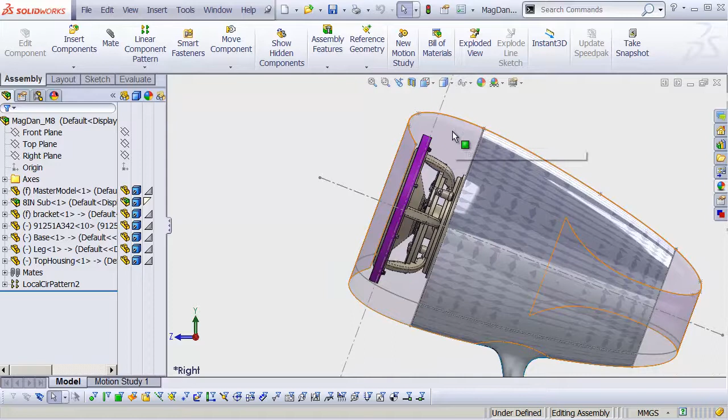Now this thing is finally actually really starting to take shape, and I next want to do the front piece of this, which I think we can do in a slightly different way. Because this one doesn't have to be in clamshell draft, it's actually in side draft, we can do this in a slightly different way. Let's go ahead and go to Insert Components, New Part, same as always. Front plane, same as always.

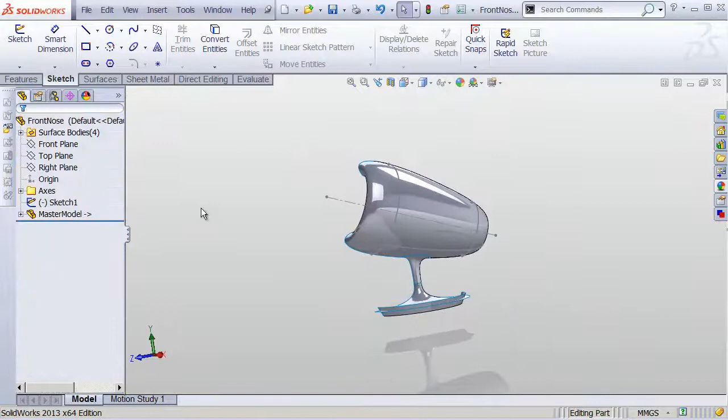We'll rename this Front Nose. I don't know, I'm making up these names. I'm going to right-click that and Save Part in External File and hit OK. Same as always, we'll open that up, insert our master model, and hit OK. We just need the surface bodies and unabsorbed sketches. And we actually only need that big fuselage piece. We don't need any of these other pieces. So we'll just delete those out right off the bat, just to clear this all the way out.

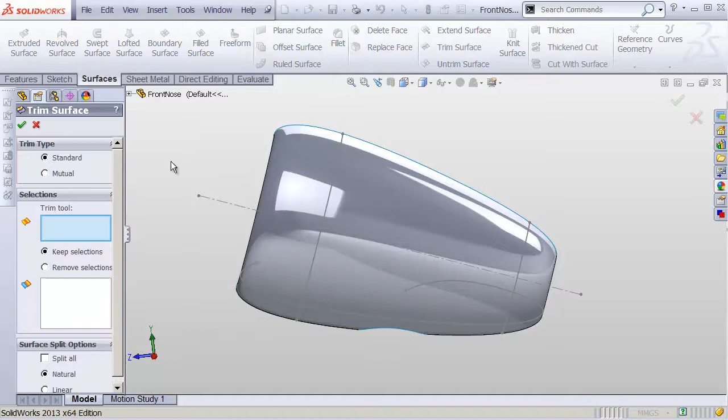Now, the next thing is actually to trim back this surface a little bit. So let's go to our surfaces. We'll do a trim surface. We'll do standard mode. We'll use this front guy. And this time we're going to keep the front nose cone of this. Hit OK. We're left with just that surface. And from here, I don't even need any of these sketches. So I'm going to hide the sketches as well, just to get those off my screen. And let's call this a nice, I don't know, purple color.

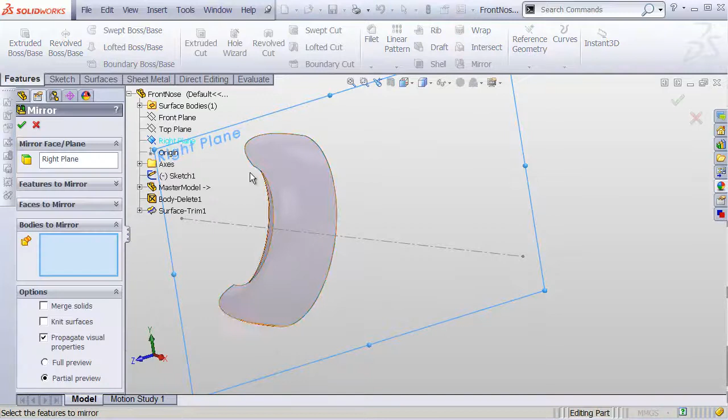And I'll grab the right plane, Features tab, Mirror, and under Bodies to Mirror, let's choose that surface body. And make sure to check the box for Knit Surfaces. Hit OK. That's going to merge that all together into one big round thing. Now, this one we're going to use a different method for making it solid because it does have an undercut, and it's actually going to be pretty straightforward to do.

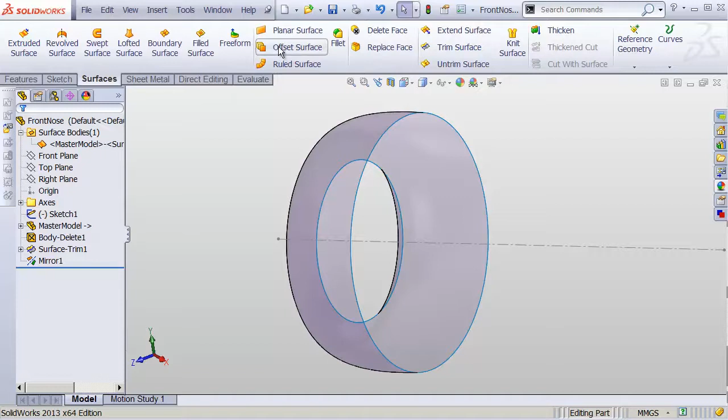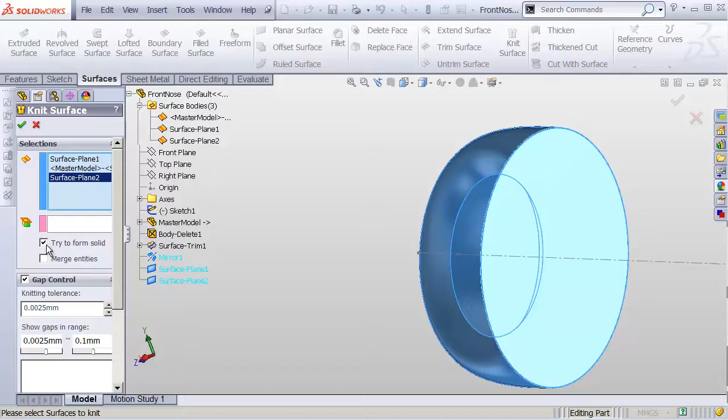Let's go to our Surfaces tab. We'll do a planar surface right here and hit OK. We'll do another planar surface on the other side and hit OK. And then finally, let's just knit those together. We'll do knit this, this, and the back face. And make sure to check the box for Try to Form Solid. If you don't check that, this won't work. Hit OK. And now we have a solid chunk.

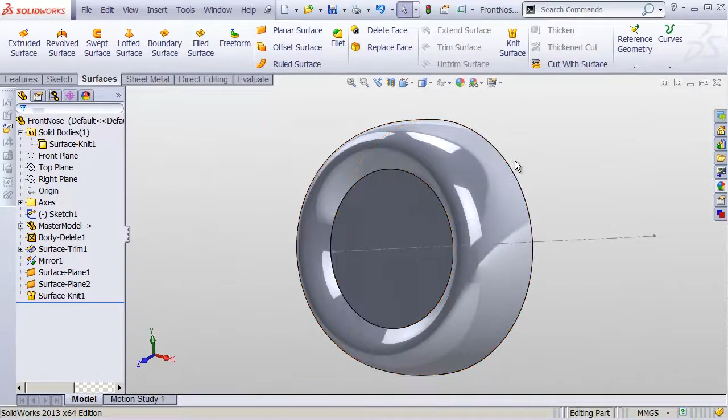And I know that this is solid and not just a closed surface body because over in my FeatureManager design tree, I have a folder called Solid Bodies, and this body happens to be listed underneath that folder. So I know this is a solid without a doubt. Next, I can go to my features and over to Shell. And once again, let's do a 3mm shell. And I'll just click the front face here, but also the back face. Hit OK. And that's going to hollow that out to 3mm all the way around. So I'm left with just the final part as I want it to be.

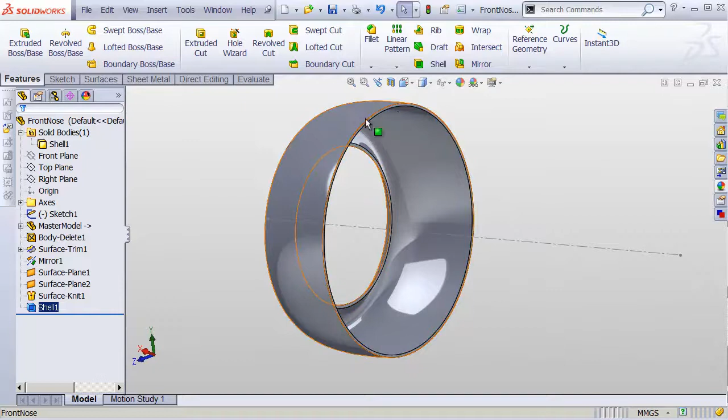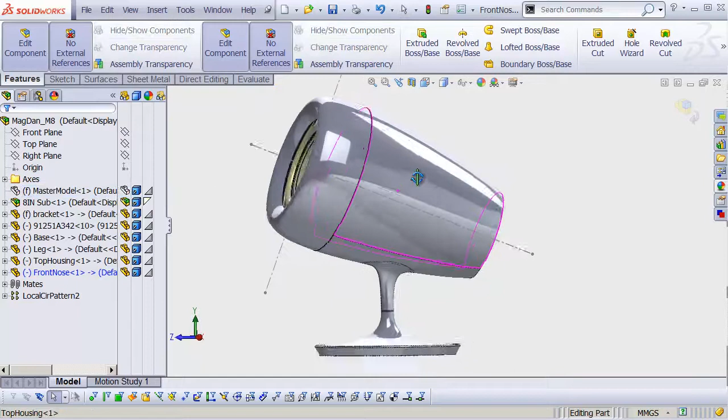Now, obviously, I'm going to need some mating features in here and stuff like that in order to be able to connect this with the rest of the design. But we're going to save that for later. Let's close this up, go back to our assembly. This thing is starting to take shape here. Really, all we're lacking is this back piece to have a pretty complete looking model. I'm going to hide the master model for a second here. And just for fun, let's go ahead and apply some materials to this, just because we're getting to the point where that's going to be a fun thing to do.

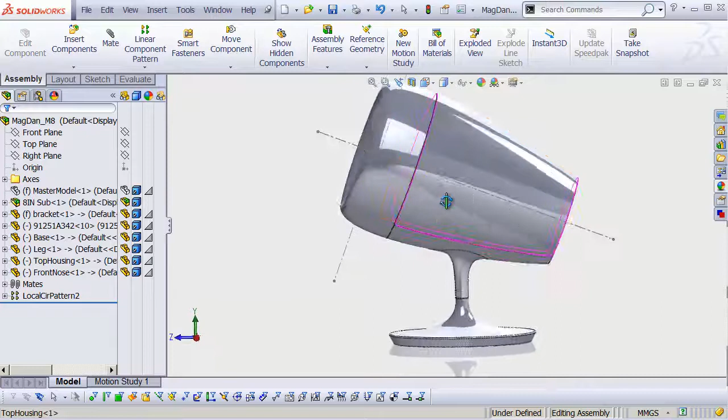Next, I'll exit that part, because I was editing that front nose part in context. We'll go up to that 8-inch subwoofer subassembly. Click on that appearance that we assigned, and click Remove Appearance. It's going to bring it back to its default appearance, which looks nice. Then I'll go over to my materials here. Let's go to my metal materials, expand that down. We'll grab a chrome, and I'll do a chromium plate on this front piece here. We'll do that for the entire front nose body. Oh, that looks sweet. Oh, so sweet.

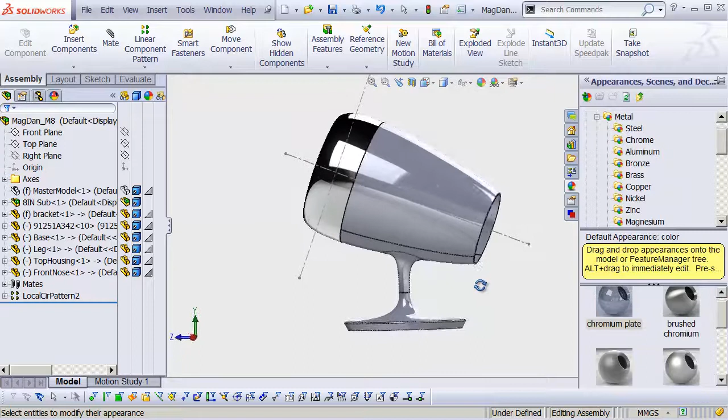And then I think the idea was that the bottom of this would be chromed out too, so why don't we just do it all the way. We'll just go chrome all around, baby. Chrome it up. That's looking all kinds of crazy. I don't even think I like that much chrome. What about a brushed chromium? How about that? I liked it better before.

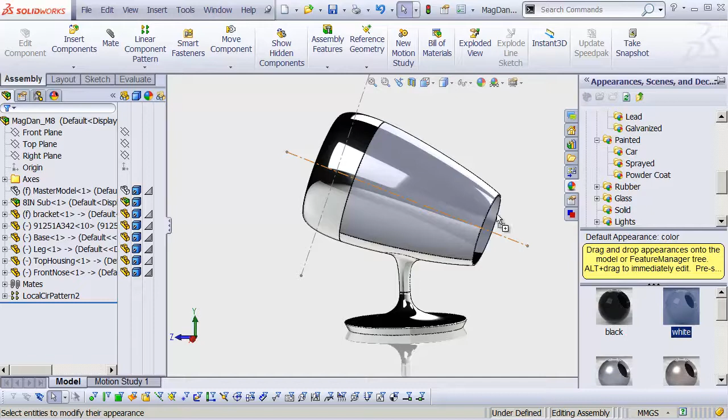Yeah. Sweet stuff. Then we can go to, I don't know, let's go to painted materials here. We'll go to sprayed paints, car paints, how about? I'll grab a white car paint, drop it on here, that top housing. That's looking so cool. Oh, that is so sick. All right, I can't wait to add some more detail to this. All right, let's move on.